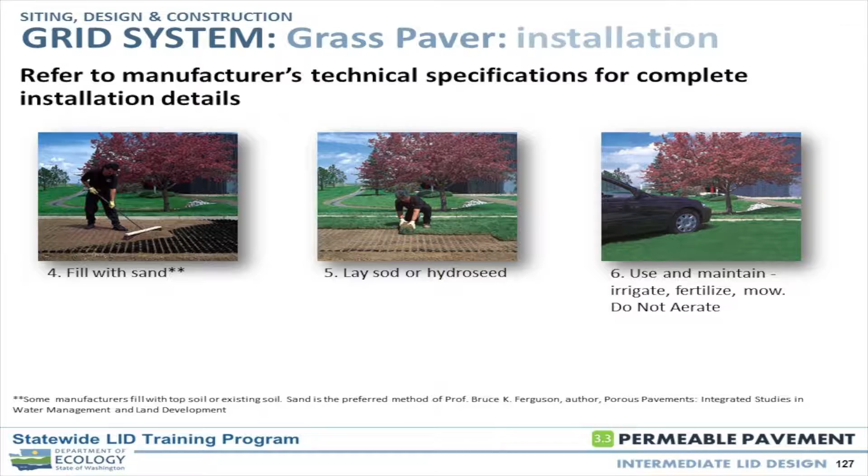And there's several different water quality treatment mechanisms active in permeable pavement systems. And some of them you can imagine. Physical filtration is one of them. That's why they can clog. But biological degradation, these things do have microbial populations growing in them that can be effective hydrocarbon removing mechanisms.

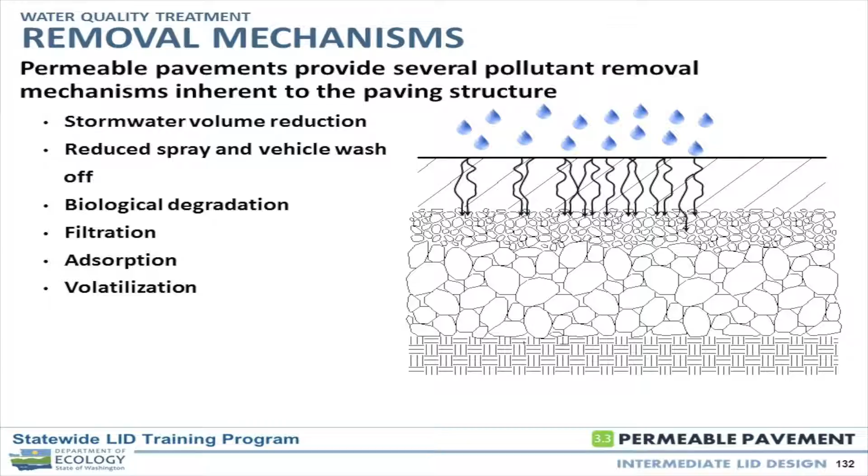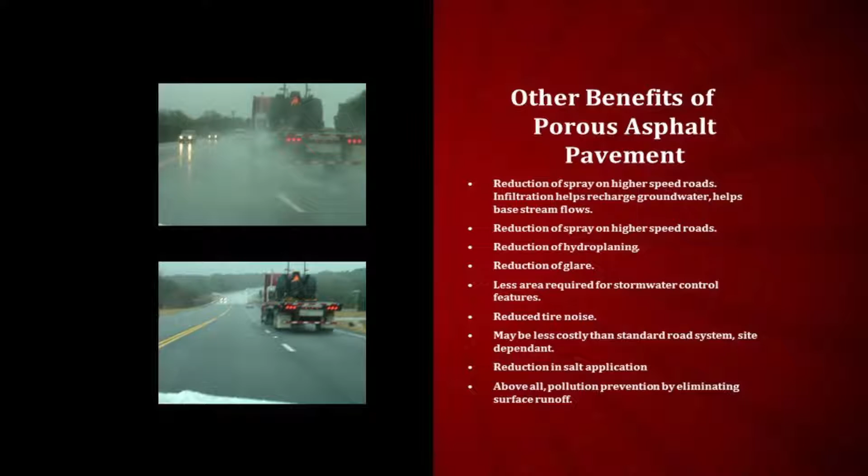Vehicle wash off or spray. You know, you saw the picture that Mark had of all that spray coming up off the road, and well, that stuff hits the undercarriage of a vehicle and stuff washes off the vehicle. In an operating permeable pavement system, you would expect less of that. Just a couple of mechanisms that you might not think of. You know, a lot of different contaminants. We focus primarily on hydrocarbons and metals for the pavement systems, but there are others, certainly nutrients to think about.

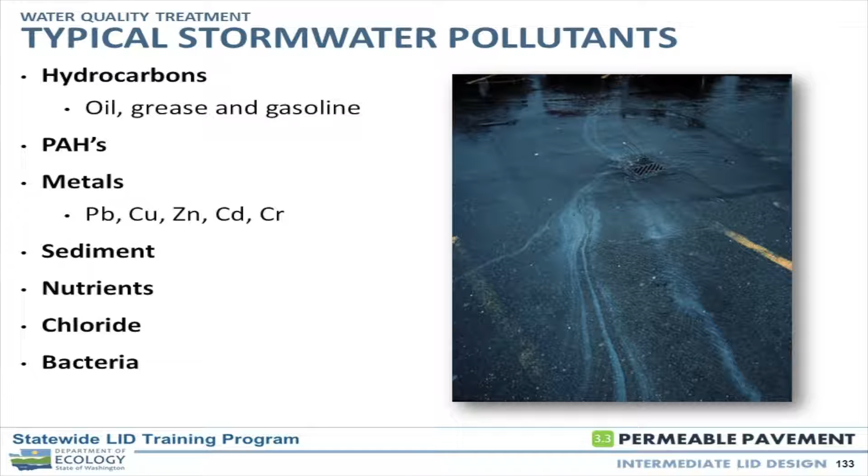Chloride, you understand there's nothing that treats chloride. There's no treatment for it. You introduce chloride into the environment, we have no treatment mechanism. So reduction, and that's why University of New Hampshire's research has been really interesting in that they think they're reducing their salting application by 50 to 75%. That's the only treatment mechanism for chloride, period.

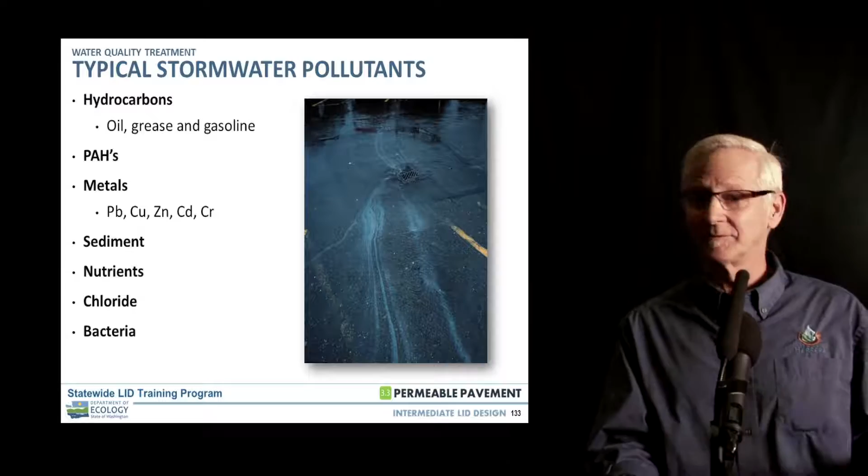So how many people have used the International BMP database to kind of look at the performance of different BMPs for water quality treatment? It's a great resource if you're interested in this stuff, the International BMP database. And the object there is to gather lots of different studies, to look at how these studies were done, be able to compare across studies, which is often very difficult. And so it's a great resource.

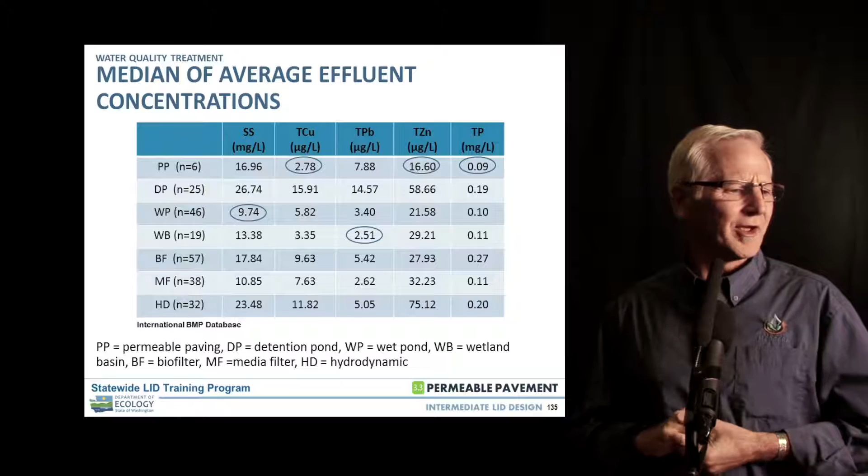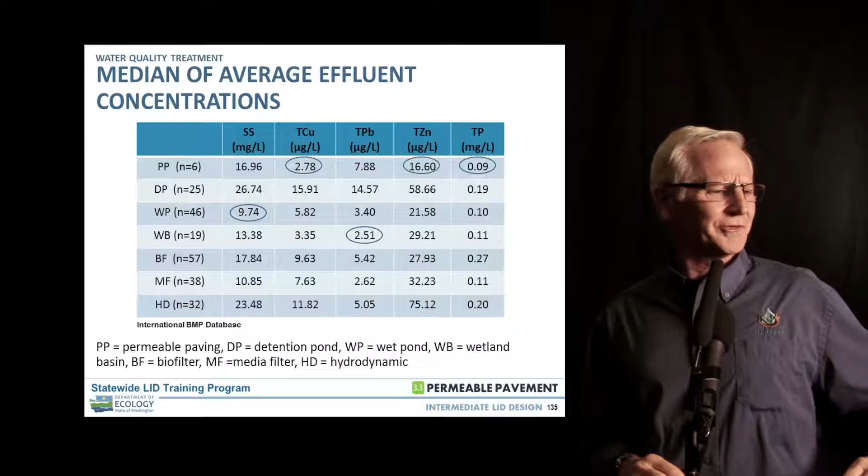And when I first started looking into water quality treatment and permeable pavement, I thought, oh, I'll go to the International BMP database and look what they have to say. So this is kind of an older slide, but it was interesting. You can see all these different practices down the left column and permeable pavement up top there. Not many studies at this time, but it was interesting to see that in 3 of the categories, total copper, total zinc, and total phosphorus, permeable pavement was one of the best performers.

That surprised me. Digging into that a little further, I'm just going to focus on a couple studies. There's quite a few out there, and there's some new data coming online here soon for our region. A really good study was done by Derek Booth and Brattebo with University of Washington. This was some parking stalls in a King County material handling yard. And so rather, industrial site.

So this was a regional research project that's really, I think, very valuable for us to kind of get a better sense of how these systems are behaving for water quality treatment. Low numbers on the zinc, too. These other studies, one from France, one from Amsterdam area, and one from Texas, and you can look at the numbers on these. There'll be 3 studies I want to focus on.

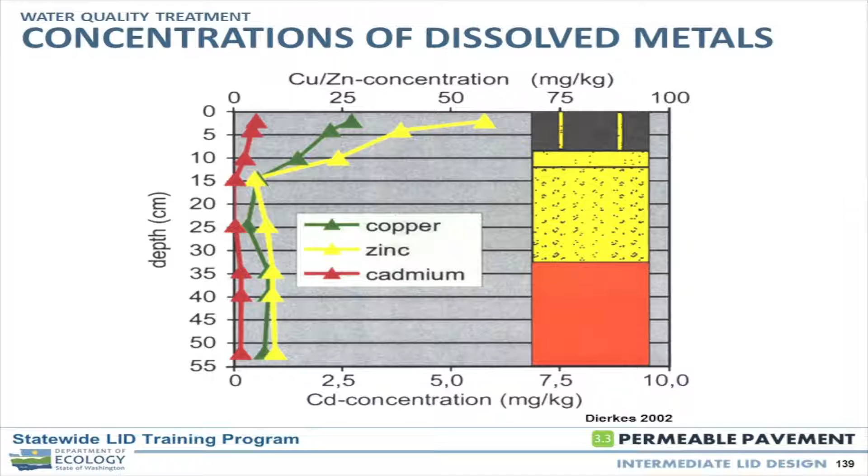And the fundamental question is, we've been approaching stormwater from a wastewater perspective. Collect it, convey it, get it off the property, and get it to a central system that then we discharge or do something with it. And it's basically been a wastewater approach. And we are fundamentally changing that approach in a very big way and now going to these distributed approaches, trying to manage water across the entire site.

What that means is we're managing water in lower hydraulic and pollutant concentration loads. We're distributing across the site. And I think this study points to the trend we would hope to see in that approach, and that is these systems being able to handle that lower hydraulic and pollutant concentration load adequately in the soils long term, because we are not concentrating lots of water and higher contaminant loads in one place. We're distributing it across the site. Fundamentally different than what we've been doing.

So these are the things I think about when I'm driving to work. I don't know about you. Maybe you don't think about this at all.

But anyway, we are taking a very different approach to stormwater in the low impact development green stormwater management approach. And these are the kinds of things we need to consider as we're doing that. The last study that I would focus on as far as water quality treatment would be this really interesting study from Pratt & Newman in the UK.

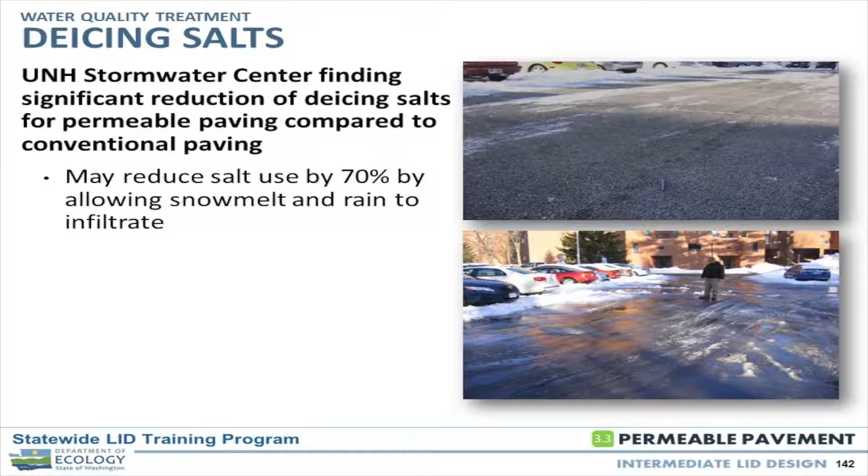Let's finish with a quick story, since we talked about cleaning pavement in this last couple of minutes, cleaning pavement and infiltration rates. This is a project called Meadow on the Hylebos, and it's a pilot project for Pierce County. And it's a really interesting case study. It's one of the first low impact development residential developments in Washington State. I think actually the first.

And I spent 3 years out there monitoring the project. It was primarily flow control, very detailed flow control analysis of this project. If you're interested in that, you can get that research through the Water Environment Research Foundation. There was a pervious concrete shoulder. The road is super elevated and it drains to one side where they had about a 3 or 4 foot wide pervious concrete shoulder. And so I'm out there virtually every day working on the instruments and collecting data, watching the whole construction process.

And it was so interesting being out there, nobody knowing who this guy is, another construction guy. And so it was just kind of the fly on the wall. And it was so interesting to watch the workers, for example, doing landscaping and other things. They would wash down the pavement. The home builder was trying to be conscientious and keep the place looking nice. They heard there was something special about the project, but didn't know what it was. And so they'd wash down the pavement.

And I could hear the conversations. They're like, wow, this is really cool. We wash down the pavement, and all the dirt and water just disappears into that concrete. I'm just thinking, oh, this is perfect. I love it. And then on top of that, the builder, wanting to keep the site looking nice, once a week would have a truck come in and wash all the debris and dirt off of the asphalt into the pervious concrete.

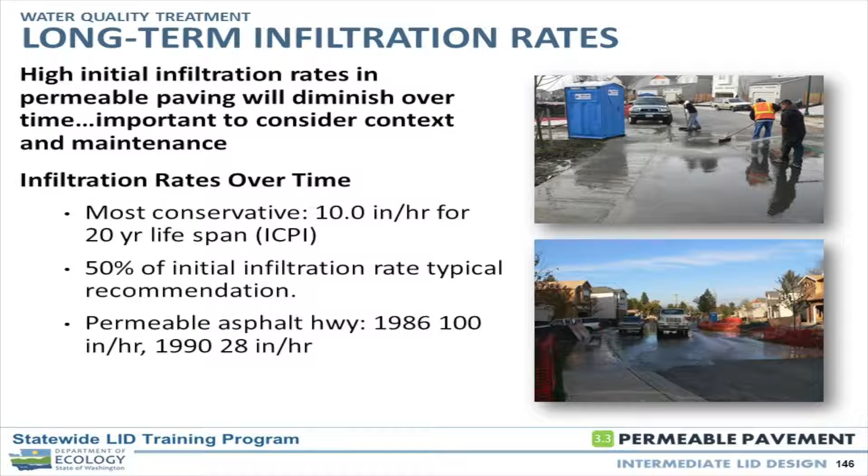So if I was going to design a pavement clogging test, absolute worst case scenario you could possibly imagine, this would be it. And so fortunately, we had been measuring the infiltration rates on this, and the initial rates were about 1,000 centimeters per hour. After all of that activity it was down to about 3.3 centimeters an hour. So now we're getting very, very low, down to around 1 inch per hour. And they came back in and pressure washed and it came back up to 105 centimeters.

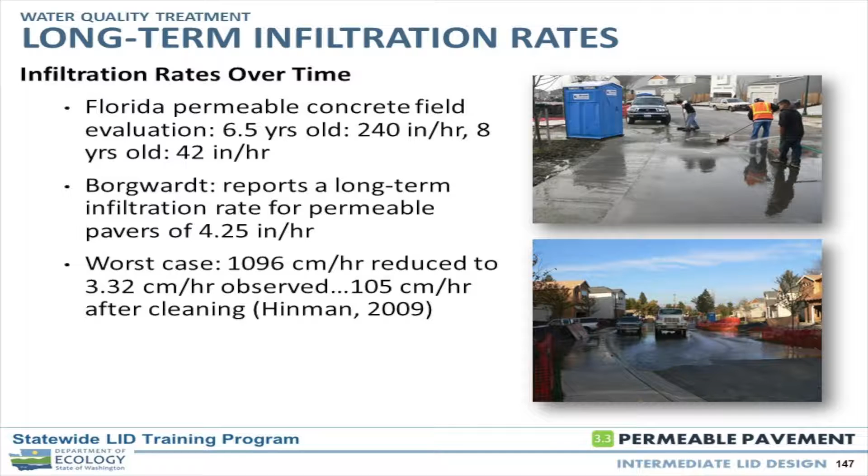I like to point this out because I think this is probably the worst case scenario you can imagine for a pavement system and how it might behave over time. And you can bring it back with something as simple as a pressure wash. There are other recommendations you see out there, and I would caution you: 50% reduction in infiltration over time is a typical projection that you hear. I'd say that would be okay for a clean site, not a lot of vegetation and debris coming onto the site. Otherwise, that's probably optimistic. But again, you could lose 90% plus and still be at infiltration rates that are adequate.

All right. You did it. No small feat. That is a big day, a lot of information. Probably at this time of day, the information is flowing out of your head rather than in.

The question is, what about chemical spills? Material handling areas, particularly chemicals in a spill, or a gas. So again, this is one of those really fundamental, how do we manage this stuff questions. In a conventional system, you probably have that stuff going down a drain and into receiving water. Now, we'd see that material going through the pavement and into the subgrade.

To qualify that question, though, if you look at the infeasibility criteria for pavement, that's one of the infeasibility criteria. So that's the first consideration. As a jurisdiction, we're going to say, nope, that's not an appropriate place to be using this material. And that could very much be the case. In fact, it probably is. Again, fundamentally, you have two different scenarios there. One, possibly direct release into a receiving water. In this case, release into a subgrade. One important consideration would be what's in that subgrade.